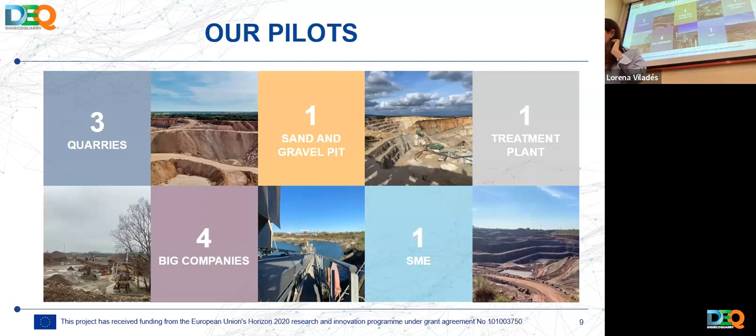Well, before I start, I forgot, sorry. Each site was named reference pilot for something, and that something was depending on the biggest issue they had at the moment. We are going to develop some specific technologies to tackle that issue, but besides that, we are developing also some cross-cutting technologies and services that I will now explain that are common to the 5 pilot sites.

The first one is 3D BIM model. Then we are also developing some health and safety improvements, an environmental simulator, social engagement strategies, and interaction with policymakers' actions too.

So with that said, the first pilot is located in Toulouse, in France, and it belongs to the VICAT group, and it's a treatment plant. And this one is the reference pilot for social acceptance. Why? Because when this plant was commissioned, it was alone. It was in the middle of nowhere a lot of years ago.

And I don't know if you know that Toulouse is a city that grew like crazy and super fast in the last couple of years. So right now, which was an isolated plant, is surrounded by shops, restaurants, the train, a park. So their neighbor is Decathlon, and the other neighbor is a McDonald's. So right now their biggest concern are all the social aspects of the sites.

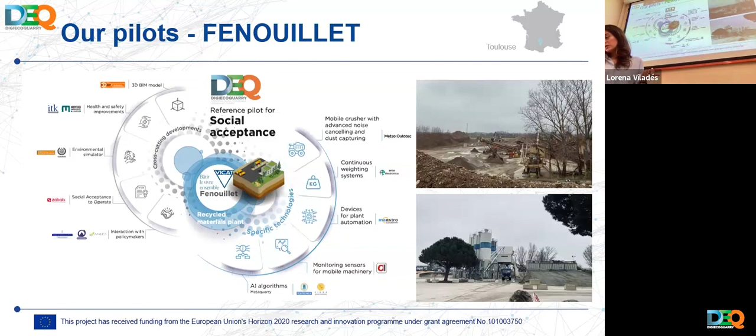Our second pilot is located here in Madrid. It belongs to the Cemex group, and is our reference pilot for drilling and blasting, because the biggest issue is the clay they have within their operation, within the quarry. So what we are doing here is develop things which may help to reduce the content of clay, like advanced rock mass characterization, a new drill, new explosives.

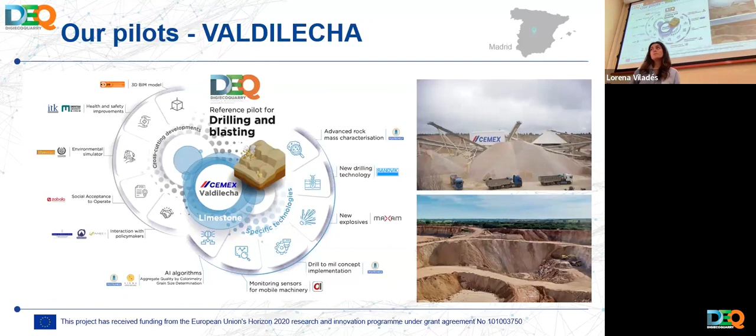We are also sensorizing and automating all the mobile fleet machinery, and also developing some AI algorithms for doing quality checks of the rock that is going to be treated.

Third, we have Pioltello, it's near Milan in Italy, and this is a sand and gravel pit with underwater extraction, which belongs to the Holcim Group. And this is our reference pilot for treatment optimization. Here we are doing a digital twin. We are installing some continuous weighing systems, some devices for the plant automation. Again, we are sensorizing all the machinery and doing some algorithms to calculate the volume of the stockpile.

I see there are some questions. Oh. Okay.

Our fourth pilot is located in Magdeburg in Germany. It belongs to Kronenberger industry, and it's an andesite quarry. Before they entered the project, they were really focused on all these things related to energy efficiency, and they had been doing lots of things regarding this. So we decided to take advantage of their previous work and name this quarry our energy efficiency reference pilot and go beyond.

And so what are we doing here? Well, we are modeling all the mobile equipment in real time. Also, the deposit is being modeled. We are developing some geofence system and algorithms which may detect the failure of the equipment.

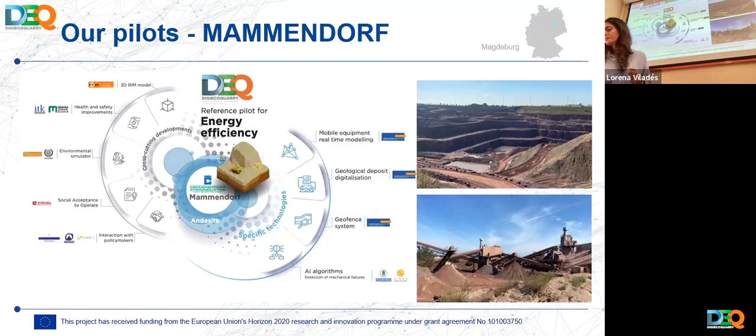And finally, our Portuguese pilot, it's near Lisbon, and it's our reference pilot for transport and storage, meaning internal transport and also external transport. We are sensorizing all the fleet. And in this way, we can track the trucks since the beginning, when they are inside the quarry, and also when they are delivering all the material to the final client. And besides that, we are also installing some devices to automate the plant.

And with that, those are our pilots. And now I will briefly go through the technologies that we are developing. But as the other sessions will be the ones which will deeply explain all the things, I will just go through them really quickly, okay?

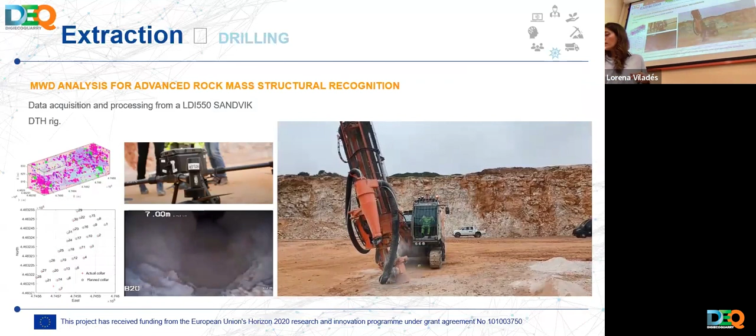First of all, regarding extraction, we are developing some measurement while drilling analysis for advanced rock mass characterization. Here you can see our drill operating. Then, Maxam is also testing some explosive which varies in density depending on the density of the rock, and connecting the full blast operation.

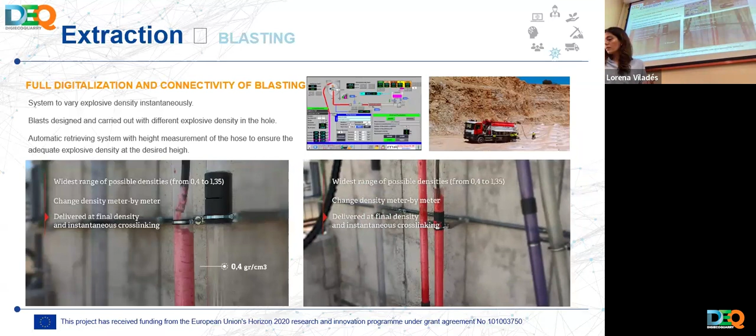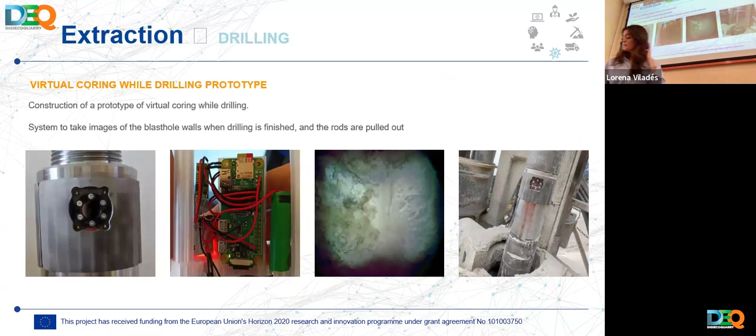We are also developing some virtual coring while drilling prototypes, which are actually installed in the drill rigs. Every time I've been telling that we are sensorizing all the mobile fleet and so on. Well, this is in order to get data related to the mass flow, the fuel efficiency, the working hours, and a lot of parameters.

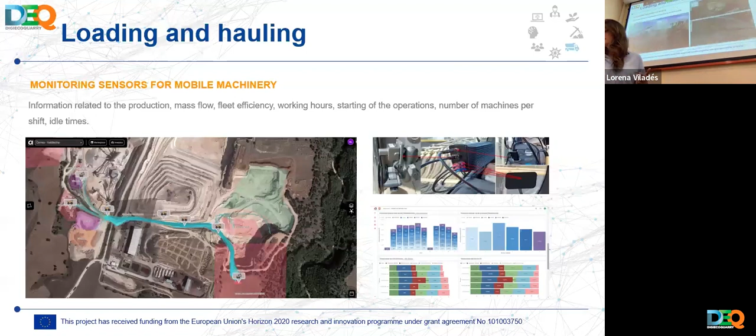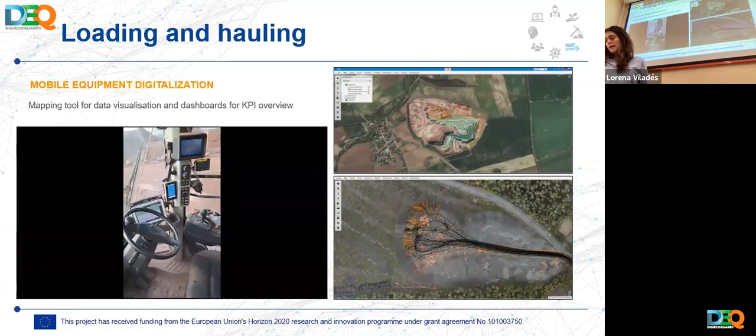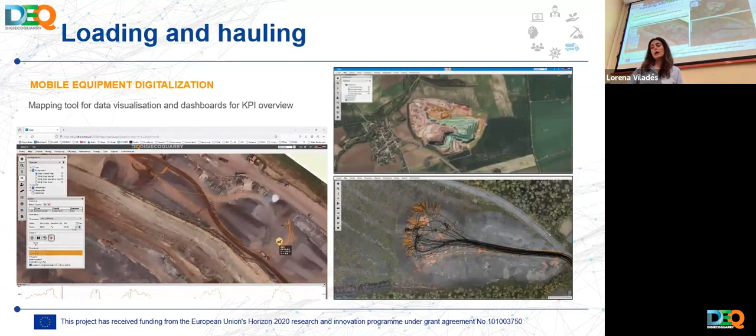Then another thing that we are doing with the mobile fleet is creating some dashboards to be able to monitor their performance. Let's see. Yeah, here are the sensors which are installed inside the machinery, and this is what the quarry manager would see. Like the machine moving around, real time.

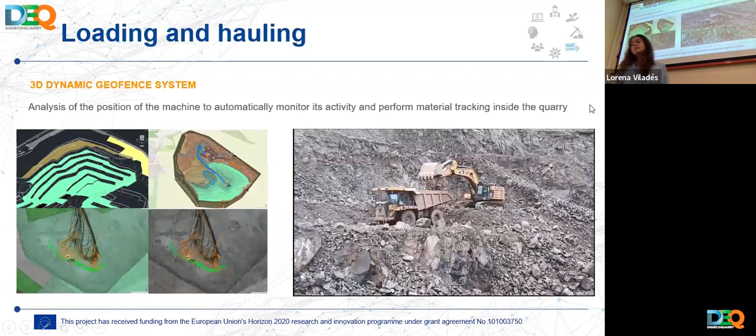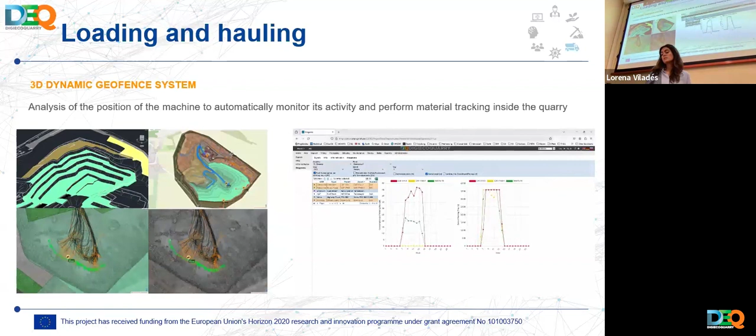Also, a 3D dynamic geofence system, again, to monitor the activity and the performance of the machinery. That's how it will be seen.

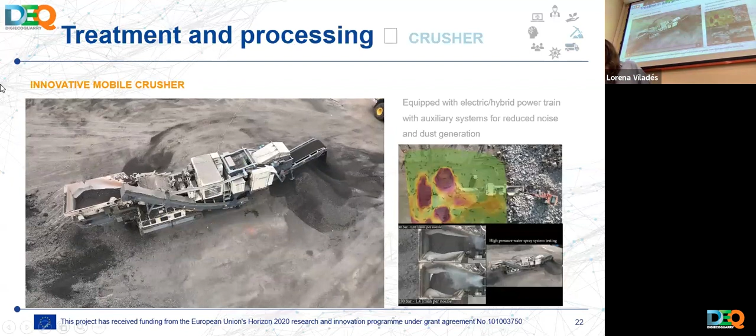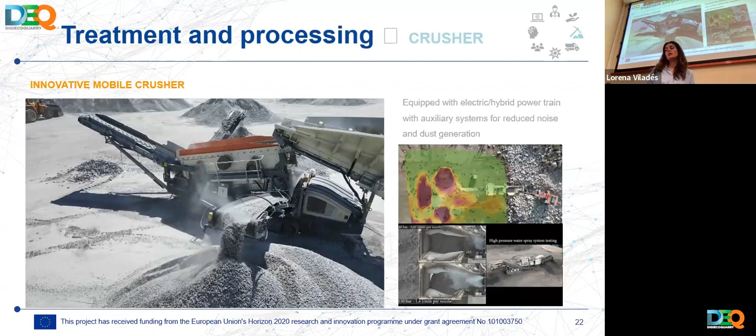Metso, which is in the consortium, is developing that crusher I was talking about before, which is equipped with electric and hybrid powertrain, and it makes less noise and generates less dust. I mean, it has systems for dust capturing.

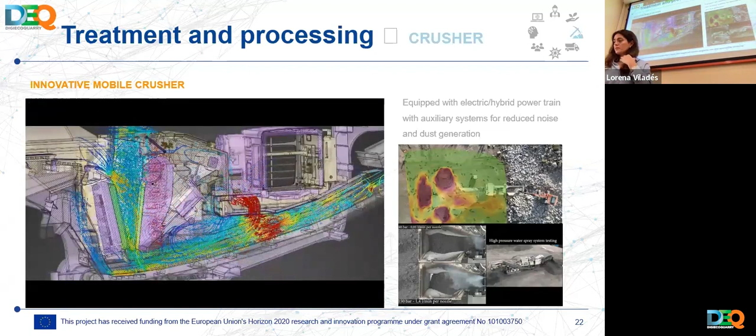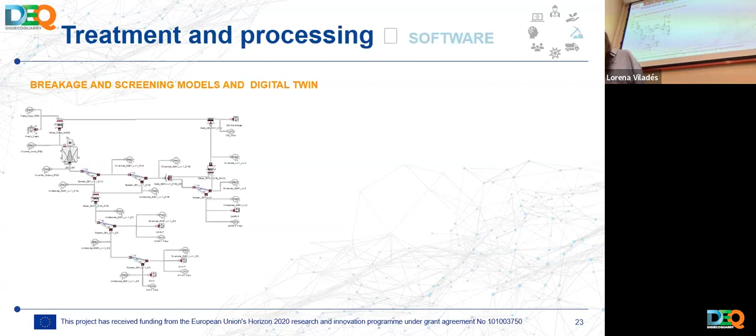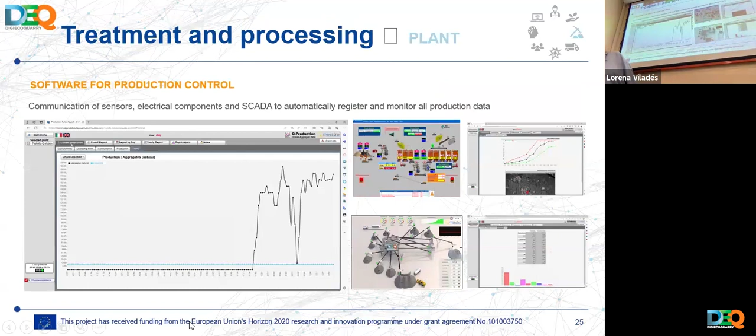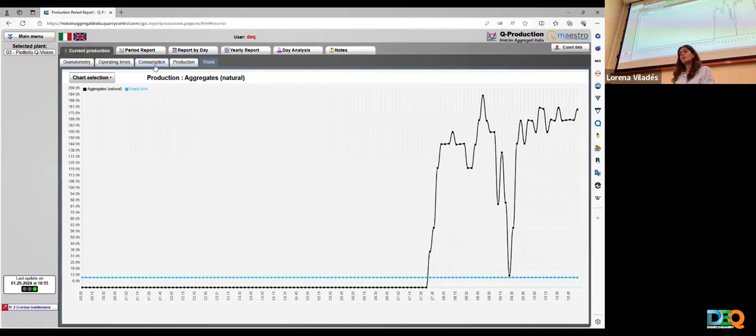Our South African partner is developing a digital twin and some screening and breakage models. We are also installing some autonomous weighing systems in the conveyor belts to measure the instantaneous flow and the accumulated production. Another of our partners is installing software to better optimize and control the production within the treatment plant. And this is what the quarry manager will see, what you are seeing right now on your screens.

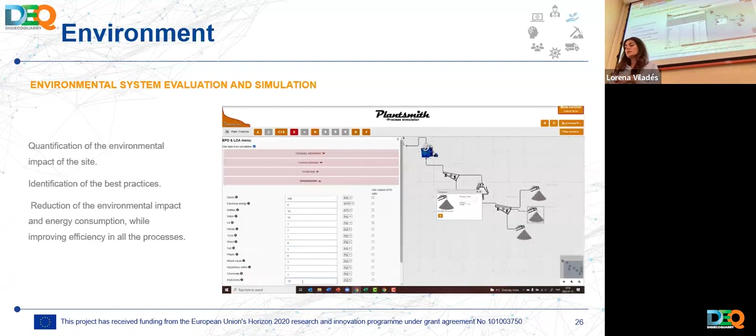One of our partners, Chalmers University and Roctim, have developed this software in which you can simulate your whole plant, and you can get as an output your environmental performance, your energy consumption, so you can improve the efficiency of your site.

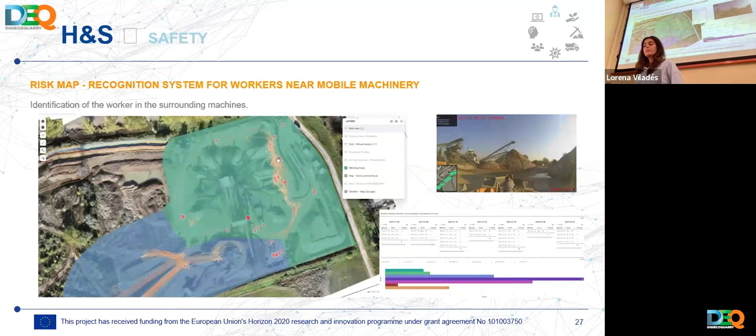Regarding health and safety, one of our partners is doing a map which recognizes workers near the mobile machinery. And this is obviously to avoid accidents. And the same is doing another partner, ITK, here with this machine, which is, between brackets, quite dangerous. So they have developed this software that can detect the people who are near the machine.

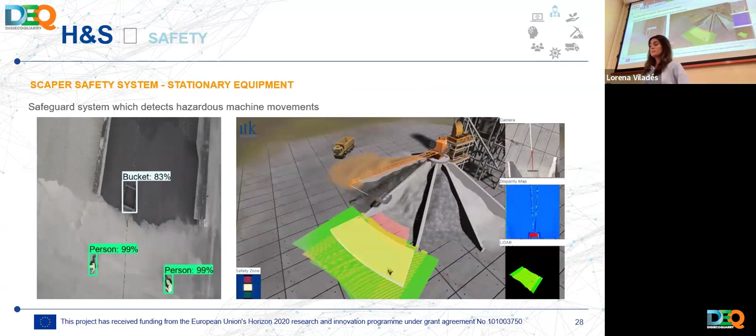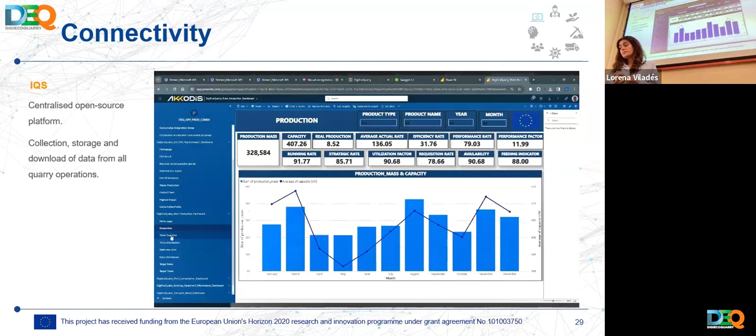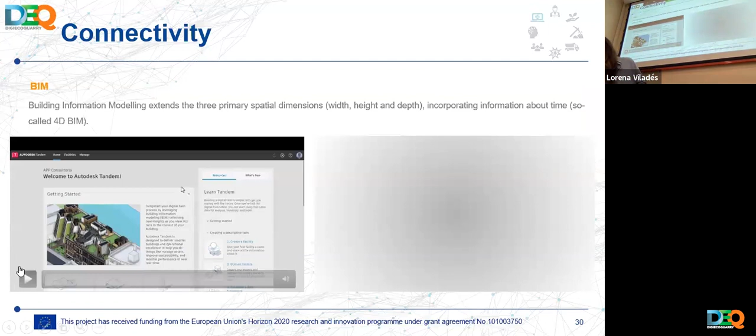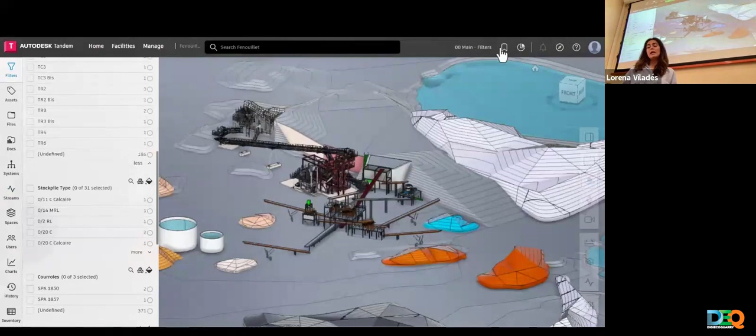Regarding BIM, well, we have models of the sites in BIM. We have a partner in charge of this, which is APP, and they will use BIM to do 4D BIM planning for the sites. Here, this is Fenouillet. This is our treatment plant in France, and you can see that it's pretty detailed here, and they will explain deeply in their session how this works and how they have been doing it. Really interesting.

And then comes the artificial intelligence, which I will not explain. I will just name it because we will have a dedicated session on this. But we are developing some quality determination algorithms by colorimetry and grain size. They have developed a stockpile volume calculation app, which you take a photo and you measure it all. Some anomaly detection of mechanical failures algorithm for the machinery, Meta Quarry, which will be explained later, and another one which is about forecasting the consumption and the products of each quarry.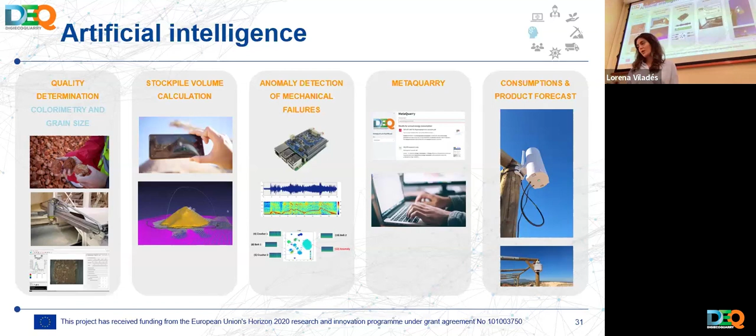But we are not just working on technical stuff, we are also going beyond. And as I said before, it's really important for us to raise the social awareness of the raw materials industry. We are creating co-creation engagement strategies. We are encouraging the sites to do open door days. We are participating in lots of conferences. We are also really involved in policy matters.

Some of you may know this roadmap, the Neutral Aggregates 2050, but some of you may not know that it was launched in collaboration with us, with DigiEcoQuarry. And of course, this is a matter that's really important to us. We are training the quarry workers on the technologies that we are developing, meaning the drill operator has received some training to be able to operate the new rig. Also, the workers are being taught how to use the BIM planning, because we are really concerned about that too.

And of course, to finish, we have faced and are actually facing some difficulties. For example, the sites' lack of connectivity. So what are we doing? Well, we are installing Wi-Fi antennas and everything we can to make the sites connected. Sites do not have historical production data, so we had to train the algorithms from scratch, which is quite difficult.